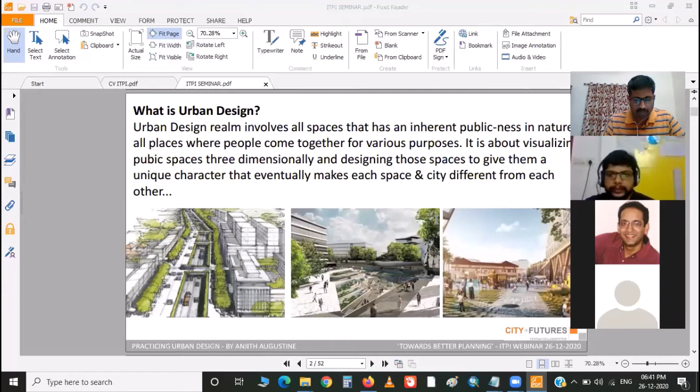Can you move to the next slide? These are some of the projects that might come in this category. There can be more, but I've noted some of the projects we generally come across while doing urban design projects, where people come together—parks, transit stations, housing communities, sports complexes, campus planning. All these kinds of projects generally come under the scope of urban design. Next.

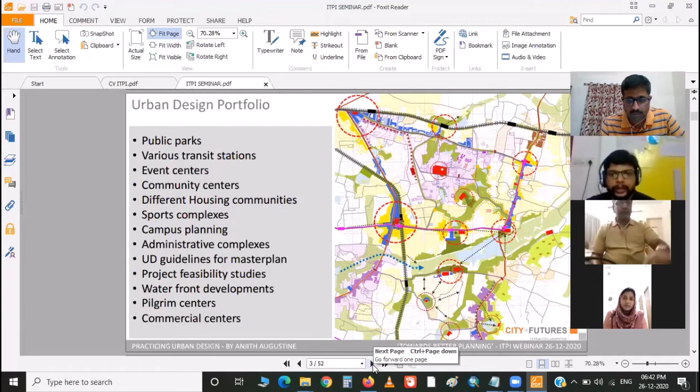Now, just to put it into an urban planning framework, where does urban design fit in? In India, we generally have the regional development plan and then the city level master plan. In some cases we go to the zonal development plan, and in rare cases the local area planning. Urban design framework comes after that - it's the last lap in planning, where each public space is detailed to an extent where each built form is designed or given guidelines to give shape to the cities. So it's about how the shape, form, character of the city evolves.

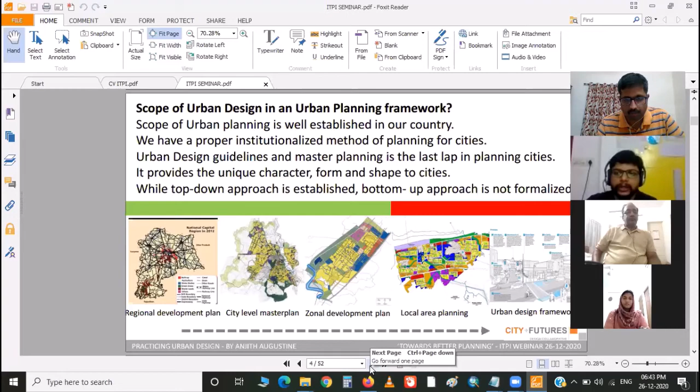In India, the scope of urban planning is well established through a proper institutionalized method. We have the town and country planning, with proper planning till the extent of local area planning. But urban design framework doesn't have a proper institutionalized format. That's why urban design is not part of the scheme of things particularly in our country.

These are just certain examples you can go through later when you have time, to look at how urban design fits into the planning framework. If you look at the Singapore master plan website, or the New Zealand master plan document, it's online so you can visit it. It has the regional plan, the master plan, then you can go into each zone, and they have urban design schemes as the last lap for how built forms should come in each of these areas. That's the extent of detail these master plans go to.

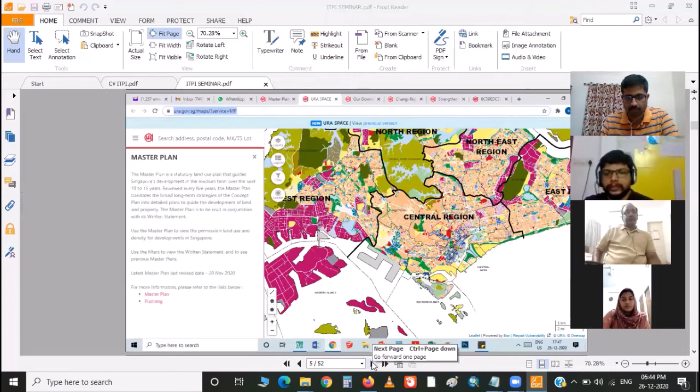Can you scroll through the next three slides? So basically, those master plans have built forms given - what should be the built form in each street or area, what are the height restrictions, what are the envelopes, what are the elevation controls. These people come up with guidelines so that a particular character is assigned to the city. Urban design fits in that area where we plug in at the last lap of giving character to cities through these zoomed-in areas of the master plan, giving particular guidelines. That is the larger scope of urban design.

But in India, it's not identified as such till now. So we are still trying to get to that level.

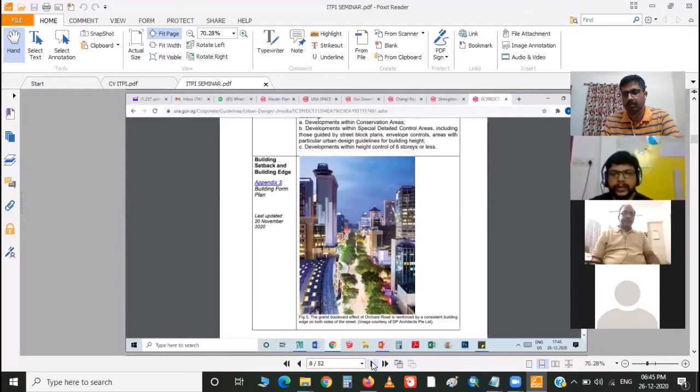Next slide. These are particularly some of the challenges which I see for the profession of urban design in our country. As I said, it's not recognized administratively as a field of study, or a field which has to be given importance. Urban planning has an institutional framework, but urban design doesn't have that. So in that planning process, we miss out on that last lap where we forget to give character to the cities. That's one issue.

The other issue is that there is no particular scope or funding for urban design projects. We have funding for urban planning projects like master planning, and then funding for architectural projects. Urban design comes somewhere in between, but sadly our country doesn't have proper project scope or funding for these kinds of projects where public space is designed as an urban design project. It's seen as an architectural project only. That is another issue.

Now again, generally in Indian cities, the shape and form, or more or less the character of cities, are not given much importance. That is also an issue we see when we look at urban design as a profession. How a city should look is not really important in the framework of things we deal with, particularly because of lack of time, or maybe the format in which we work for planning. There are different issues, but that's one core issue.

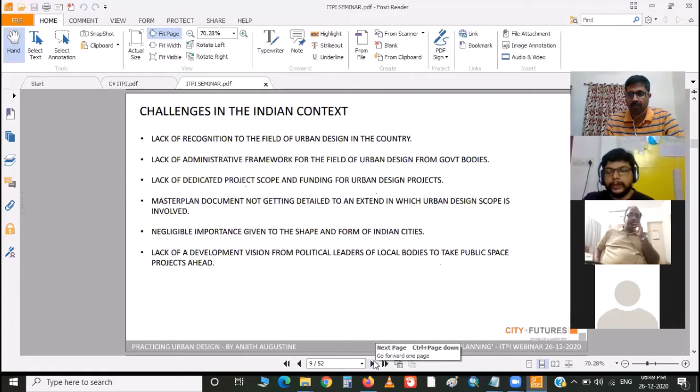When we come to Kerala, we do have urban designers working in tourism projects and other master planning projects, mostly done by the tourism department. So they are not essentially identified as urban design projects, but the scope is similar, working on public spaces and larger scale projects where people come together. The term urban design is not yet identified in those project briefs, but we are seeing more projects coming up with urban design as a profession being identified.

Now I'll quickly go through some of the projects which I personally did from my office, or did with a collective group, negotiating within these challenges which has happened.

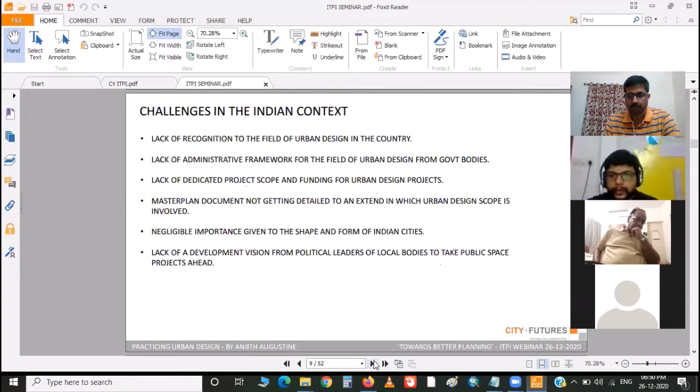This was one of the projects, my office is based in Aluva. Atkins in 2014 had done a project called Future Proofing Cities. They identified 3 cities in India. Their scope was broadly to give a framework for these cities to go ahead.

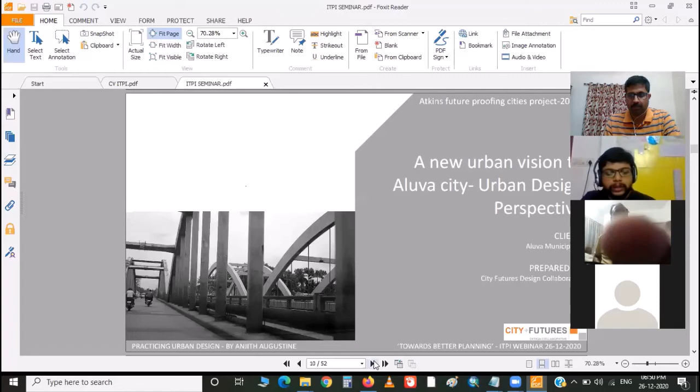For the next 20 years. Aluva was one of the cities identified. It was a UK funded project, but the funding was only for the framework development, not for projects as such. They just give a framework, basically a document, after the site study.

I was working as a consultant to the Aluva municipal body, working with the municipality when the Atkins team was on site. That project went well. There were stakeholder meetings, site visits, and it got good coverage in the news.

They finally came up with the Future Proofing Cities document, and the Aluva document was handed over to the municipal body. The next issue was that there is no funding for the municipality to take these projects forward. You got the document, but no funding from the UK government to do the project.

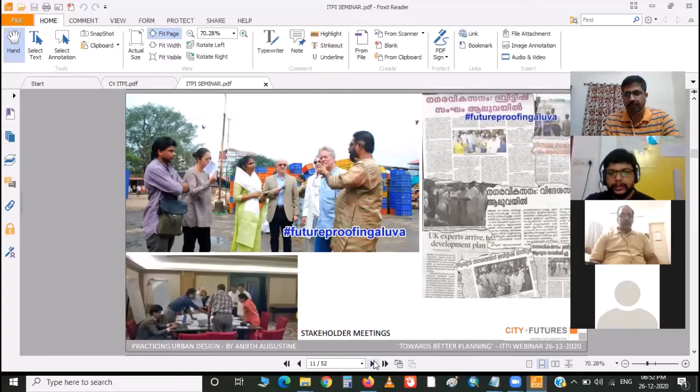So the next step I worked on with the municipality was to narrow down these projects into multiple smaller projects, trying to get them done through different project schemes, not necessarily from the municipal fund, because Aluva municipality is a very small municipality without much funds. We were trying to get these projects done as smaller units through different agencies.

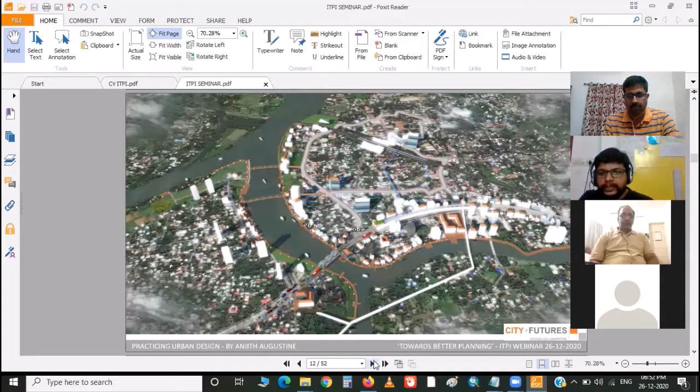We identified multiple different projects which can be done with different agencies. One proposal was a riverfront development along the Manappuram waterfront edge. As urban designers, we generally do these before and after images showing how the place looks now and how it can become. That's one way we approach design schemes.

We presented a set of images like this showing how these projects can be developed. These are potential projects which the municipality can do through different agencies.

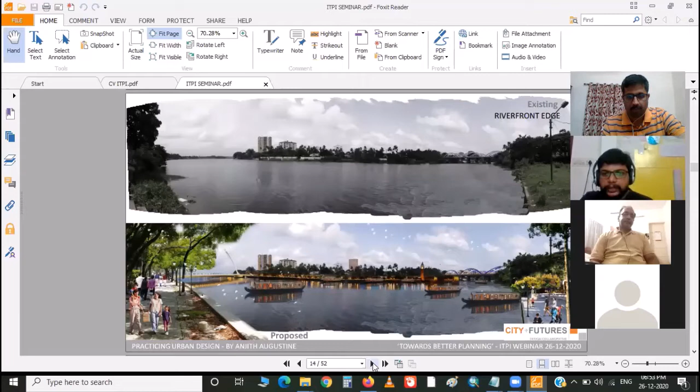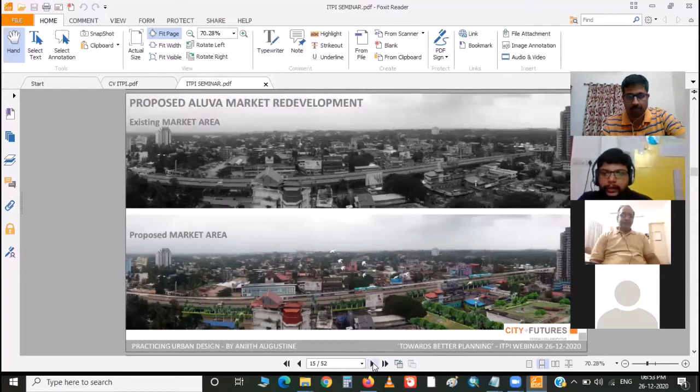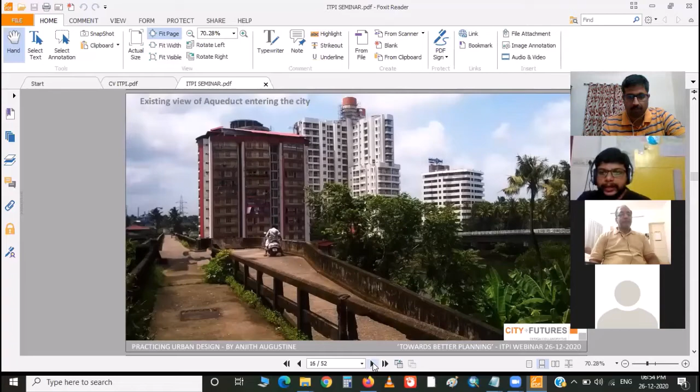This was another project identified. Aluva city has a large aqueduct network within the city, so we tried to identify it as a pedestrian connection, where people can use it as a movement system to connect to the metro system which was coming in at that time, under construction. We imagined it as a walkway where people can connect to the metro through these pedestrian channels.

We intentionally did a lot of media presence, so to say, on how these projects can move forward. We had sessions organized by Manorama, and sessions where these projects were discussed with other experts. This gave an impetus for these projects to be taken up individually by different agencies.

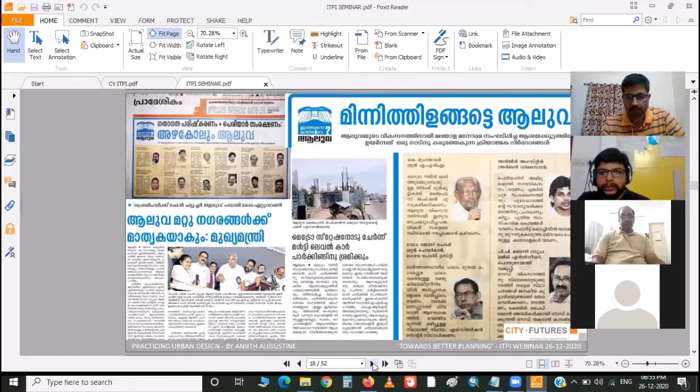Metro was one agency which at that time was ready to take up one project, the Metro bypass corridor. I'll be showing it next.

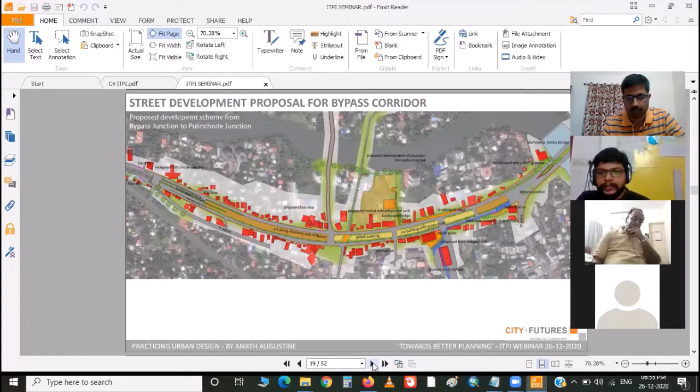So this was another proposal which we presented to KMRL from the municipality, where the stretch from bypass junction to Pulinchode junction was identified as a pedestrian network. It connected the market, had the upcoming metro at that time, and the private bus stand. We tried to work out how transit routes, parking, and landscaping could come in at that point. We gave a rough estimate proposal from the municipality side and presented it to KMRL. KMRL took it up as a project of their own and took it forward within the stretch, so that is one of the first stretches which got completed by the metro in terms of pedestrianization.

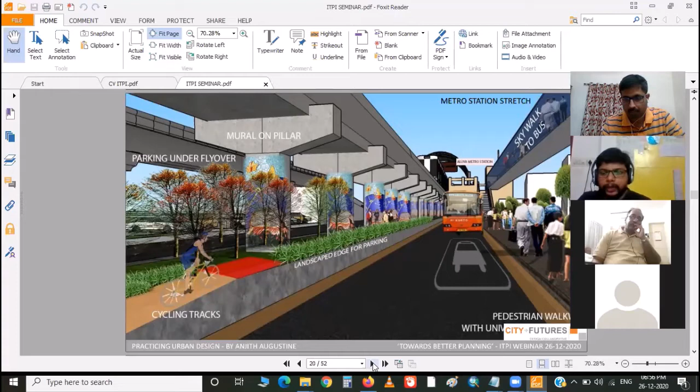So these were some proposal images which we gave. The walkway on road has been completed. The skywalk and all is yet coming up. The multi-level parking is proposed by the Metro KMRL, but it hasn't started its work. So that's how the project is coming up, as piecemeal work. But overall, it benefited the municipality in a way that different projects took up at different places.

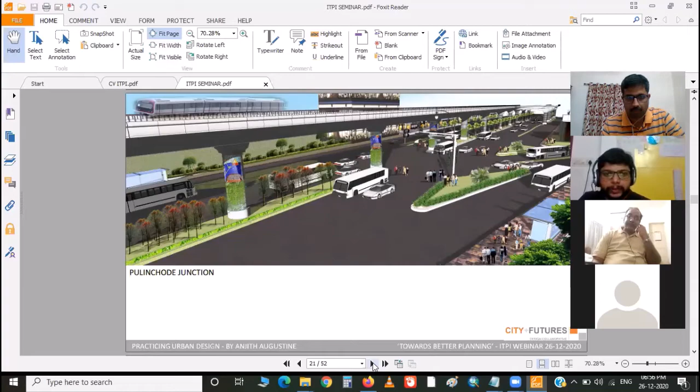These are some of the images from that project. These are some of the completed images of the stretch.

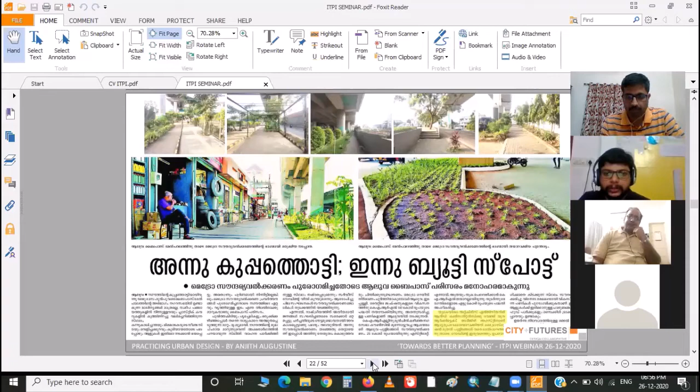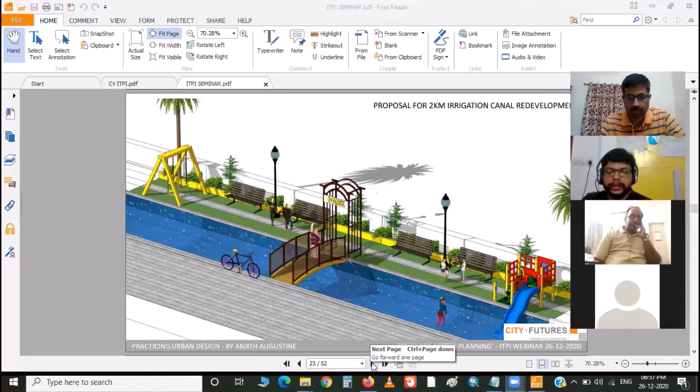Now this is another project which we are trying to get done through the Residents Welfare Association of Kadingalur area, where Aluva has a 2-kilometer long irrigation canal. We are trying to take a pilot project of 100-meter distance, where we develop the canal as a children's park kind of development. This project is being done through the Residents Association, so that's how that entire project scheme was getting done.

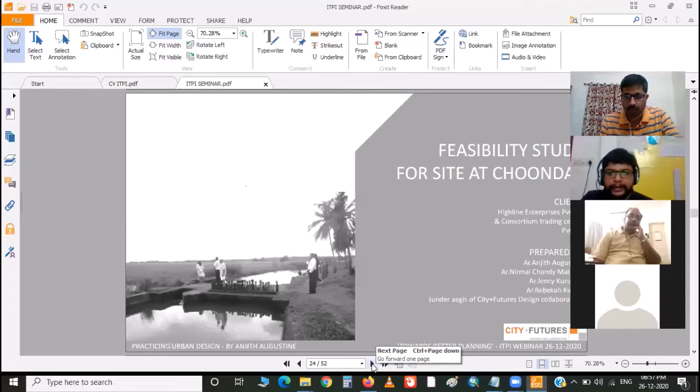Now this is another project where we were doing a feasibility study for a project at Choondal. It was for a private agency, so this was more of a private consultancy kind of project. This consortium had a 6-acre dryland and 35-acre wetland near Kecheri, Choondal in Thrissur.

So our scope was to identify what the land is, what are the possibilities of that particular land, what projects can come in there, if projects are coming in there what is the viability, and what are the built forms which we can look at for that particular land. So that was our scope.

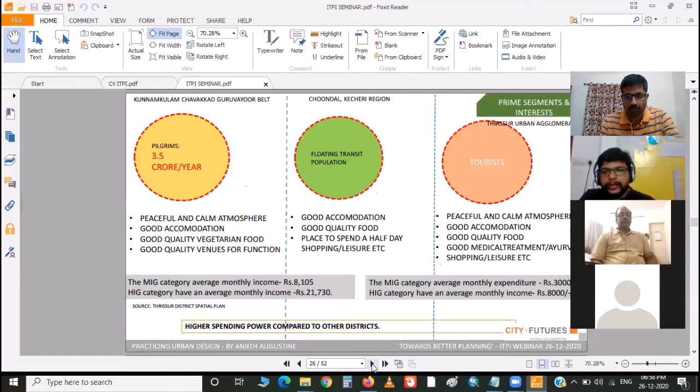So we identified the location and regional framework, what footfall is coming in those areas, what numbers we are looking at, and what kind of people are coming in. It's near Guruvayur and Thrissur, so we had a large set of pilgrims coming there, and it also has potential for larger events being hosted there, what we call MICE - more of a corporate meeting kind of scope. So we identified that potential.

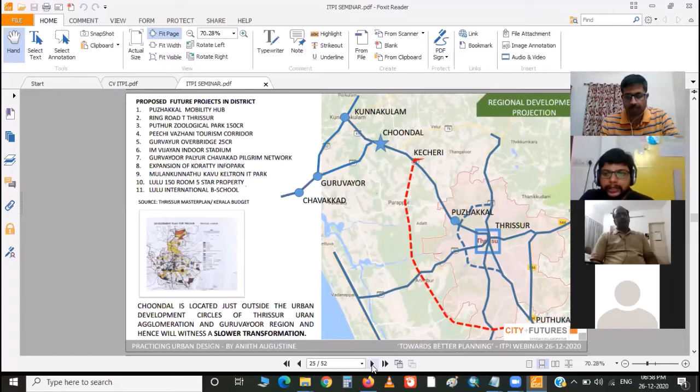So we did all the site studies - what is the site potential, what are the issues. It had low-lying areas where flooding was an issue, so we identified the site conditions. We zoned the different areas within that land. We had wetland which cannot be built, so all those considerations were done.

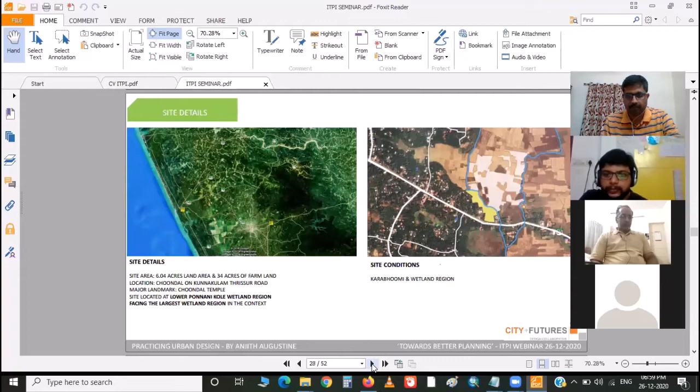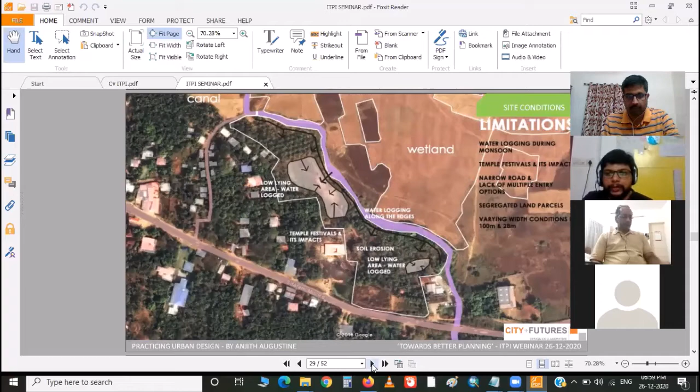So these were just the study part which we identified, where all different things can come in at different parts of the site.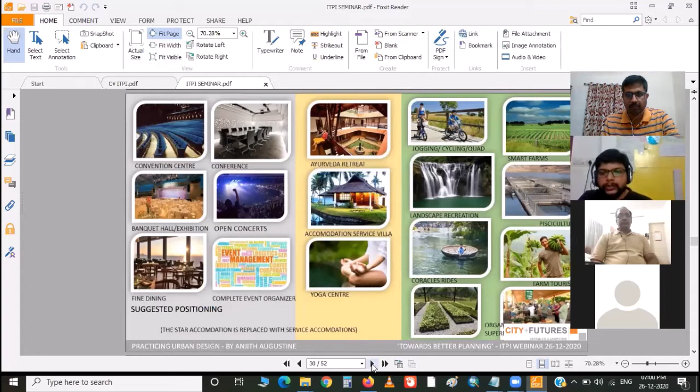With that study part, we gave a suggested positioning for the client - a combination which can come in as a viable, feasible proposal for the particular land, with a mix of different components coming in at particular areas. We gave different areas, different built volumes required for each of these projects. So a mix of this was identified as the best suggested positioning for that site. Then we gave different form proposals of how these built forms can come in at different parts of the site.

So we gave multiple options of how the entire thing can be laid out in the site, how different units can come in, what are the views, what are the vistas in terms of built volume, how it's going to come. All that was identified. We gave multiple options to the client - these are some snaps from option 1.

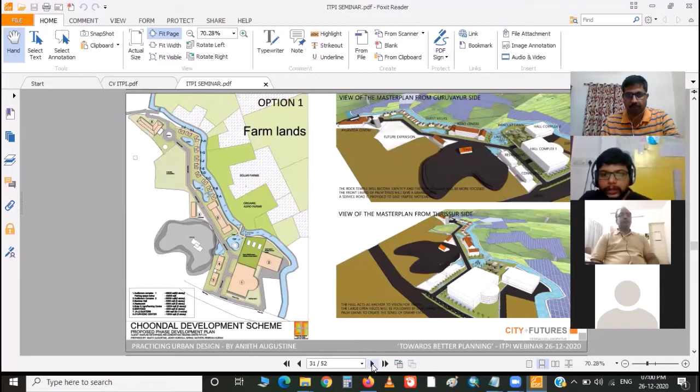So these are multiple options of how the built form can come in, respecting the land, respecting the contours of the site, and considering the levels in the site. We gave 3 options, and one of the options was chosen to be taken forward. So that was our scope.

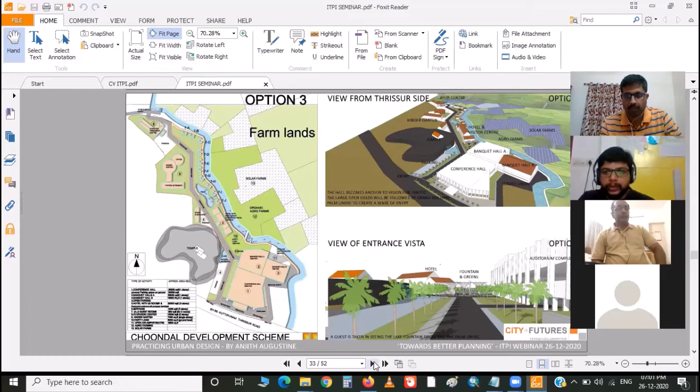Now individually, each of these projects, each of those buildings becomes an architectural project. So that is how urban design comes into the scenario. Within this building, the conference hall is taken forward by another architect, the banquet hall by another architect. They become individual architectural projects, but we set the basic zoning and positioning of the different units, and set vistas for important streets. So those guidelines were set. Other architects were involved, like Architect Fahad from Ernakulam, in the architectural projects, but our scope was still the urban design scheme.

This is another way in which my office got involved in an urban design project. As I said, urban design as a scope is not identified in the local body, so our office got empaneled as an architecture firm in the Thrikkakara municipality. That is how we worked within the institutionalized framework.

Thrikkakara municipality is where the Kochi Info Park is, so it is rich in its income. They have different projects and different funding to take forward many projects under their municipal body. So we sat with the political council and the engineering section and identified different projects, different lands, within the municipal body's jurisdiction, and that is how we identified them as architectural projects.

So when we present it in the municipality, it's an architectural project. Each architectural project is also split into maybe 2 or 3 different estimates because of funding issues - a project below 30 lakhs is considered as one parcel. That is how the estimates work. But basically we saw it as a potential to work across multiple projects.

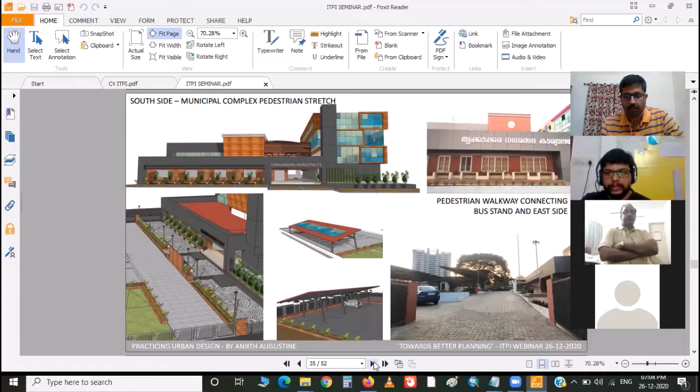So the first project we worked on was to come up with a new municipal complex building plus its pedestrian stretch, where we worked on connections to the bus stand. It was envisaged as an architectural project, but had components where we connected the bus stand to the other side of the road. We had parking complexes for visitors and guests separately, toilet complexes, and facilitation centers.

There were a lot of protests happening at the municipal council building, but there was no particular venue for that. So we designed a huge grand open hall kind of space where people can come in and arrange meetings or protests. It became a shaded courtyard like that. We also had separate vehicular and pedestrian walkways designed within the same area.

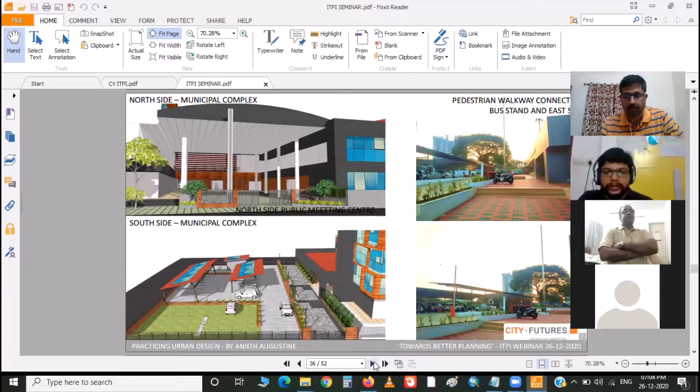All these are images from the same project. This was the facilitation center.

This parcel of land is just opposite the municipal complex building, where there was an old municipal market, an old building. That entire complex was redesigned as a new high-tech municipal market commercial complex. Again, it is in itself an architectural project, but we saw it as a development which can come together within the same framework.

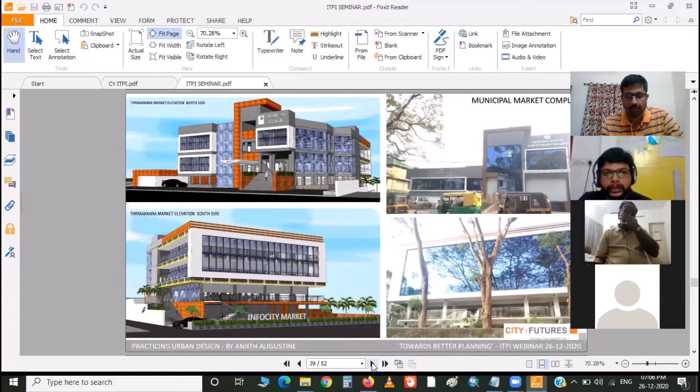This building has two roadside edges - the left side image on top is from one roadside, and the bottom image is from the other side of the road. So it was possible to connect through this building to cross the road from one point to another. We worked on approaches where people move through this building. This was another project which worked as an architectural project.

These projects are under construction - it's a canteen complex within the same compound, and here we were working as architectural consultants also.

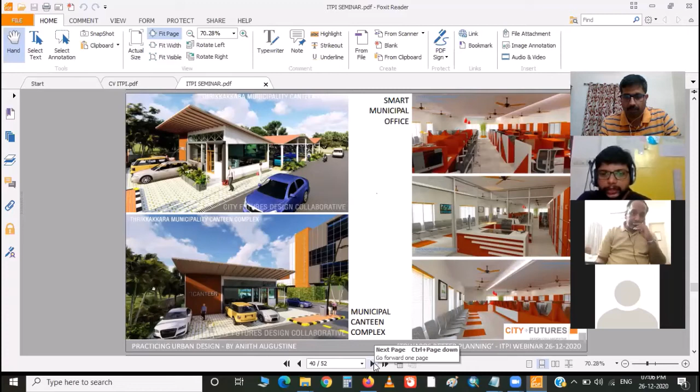We worked to an extent where the interiors were also worked out - the entire office was designed as a smart office with digital systems, fully air conditioned. In this particular project, our scope worked all the way through to the interiors.

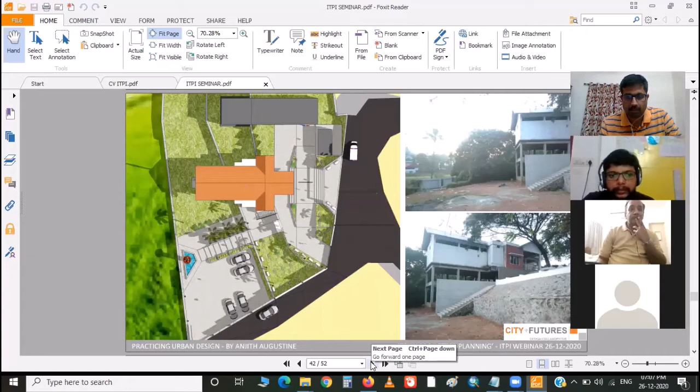Around 3 acres of land was there, lying unused. So we proposed it as a space where people can come together, along with the crematorium purpose. We gave a proposal of it being a park kind of area where the crematorium can come up.

Apart from the architectural building, we did the entire landscaping for the area, which included a parking area and a park component. Two crematorium complexes came in, along with some light towers, all imagined as part of a park.

This project is still going on. The building is completed, and the landscaping is going on right now. Just go through this.

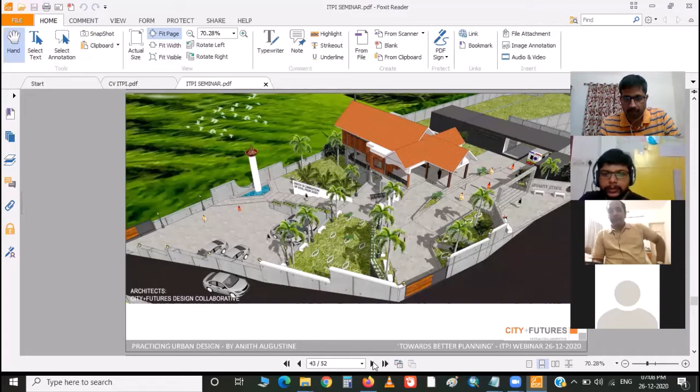This is another project, again within the same municipality. This proposal was given by us to them; it didn't come from the municipality. The proposal was to imagine a gateway to the municipality itself, since it's considered an info city, a gateway to the info city of Cochin.

We proposed using similar signages and language for the entire municipal boundaries, so that all the parks, street lights and street edges have a similar character. Bus stand complexes and main road exits and entries, like the Seaport Airport Road, should have proper landscaping and signages, giving a feel of entering an info city. That was the idea behind this project.

So we gave proposals to fulfill that approach. This is the edges of the Seaport Airport Road, where widening is currently going on. This proposal was given to be taken forward along with the widening proposal.

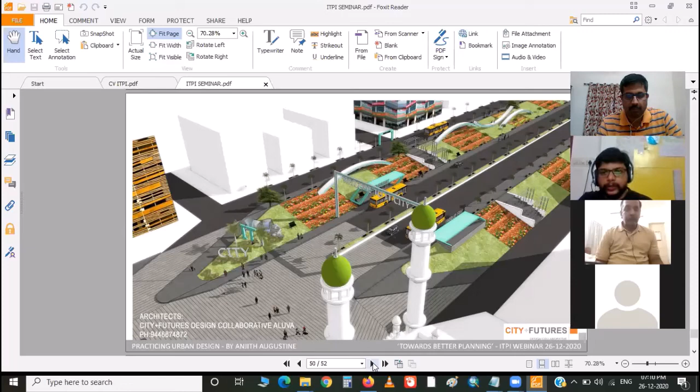It was presented to the collector, so it's still under process in terms of how it can be taken forward, and funding hasn't yet been decided since it's a Seaport Airport Road project. But basically the intention was to give an identity to the municipality by using a similar language throughout the municipal boundary.

Next slide. I think that's the end, Ranjit.

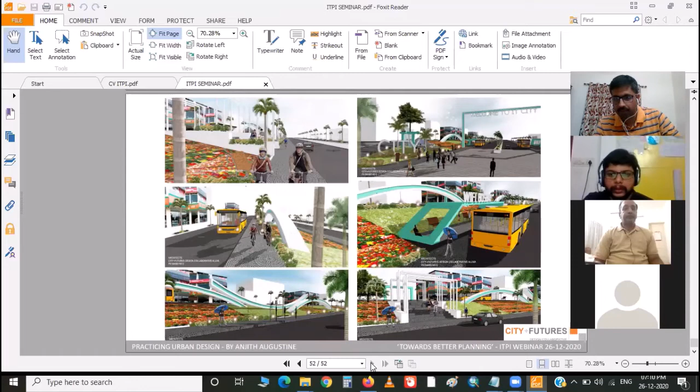So basically that is how we try to identify urban design projects within the limited framework we have, to get it recognized as a project of urban design. In some cases we become successful, in some cases the project gets dropped after we give the proposal. Some projects take a long time, but that's how the process goes.

What we see as a future is two ways. One is if the urban local body can get more knowledge on urban design projects or public space design projects, it gives a huge development impetus to the entire state. Second is the top-down process, where we have large infrastructure or urban design projects being done by different agencies like the tourism department.

But the issue is that the kind of turnover and conditions given for such projects are met only by firms from outside the state, or in some cases nobody meets it. Those are some of the challenges we see in the profession. That's my time.